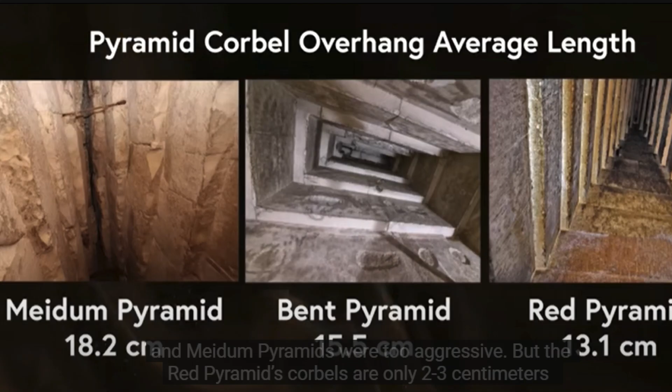But he mentioned something that turned out to be not quite correct, and I thought the research would make a great video. So I'd like to put forward my new research to correct his statements, actually strengthen his narrative, and quantify something that can seem very abstract. How good are the various corbellings? Because the amount of overhang by itself doesn't really tell you anything.

He credits Peter James to a claim that the corbels in the upper chamber of the Bent Pyramid and Meidum pyramids are too aggressive, especially compared to the Red one. There is a single source provided with that author, and it does not mention the corbels. Nor can I find it in any of his other works. Perhaps he misattributed someone else's claim, but I couldn't figure out who.

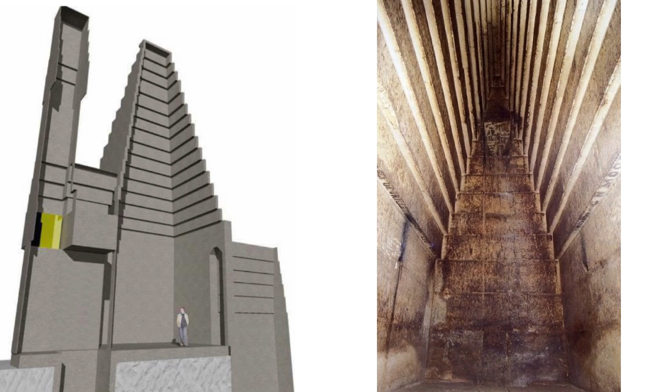History for Granite is a skilled researcher, so I think we can assume that he did read it from somewhere, and it still likely was Mr. James. I wanted to peer review the source, because even a visual inspection gives me the impression that the Red ones are no better than the Bent ones, and I wanted to know how they came up with their conclusion. Was this a back-of-the-napkin calculation or a rigorous analysis? I have a suspicion of what they did and why it's wrong, but without a paper, I can't check their math.

Luckily, we don't really need that paper. I'm perfectly capable of doing that rigorous analysis myself, so I devised a formula to score the different ceilings. If the science is sound, then it should be repeatable, and even different analysis types should agree with each other. If we disagree, well, my source code and data is available in the description, and I welcome the peer review.

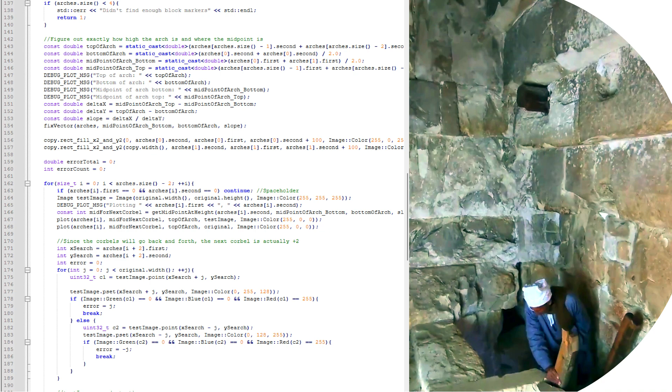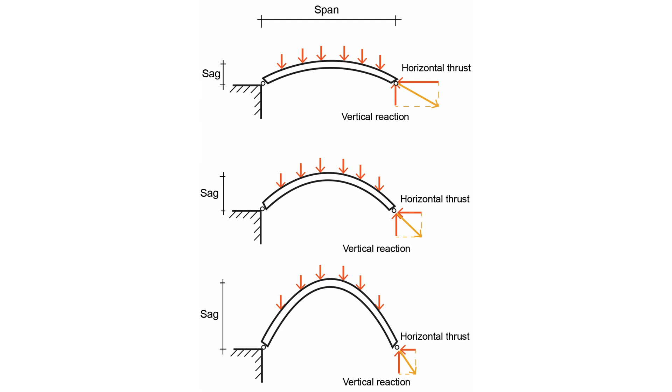I actually went through most of the corbel ceilings of Old Kingdom pyramids, and produced a score for each one, so we can see if they were trending towards or away from correct ceilings. Let me first explain what I even mean by a correct ceiling. In a perfectly shaped ceiling, all of the pieces collectively have minimal forces on them, both vertically and horizontally, since you are redistributing forces. You probably already know that an arch is stronger than straight corbelling.

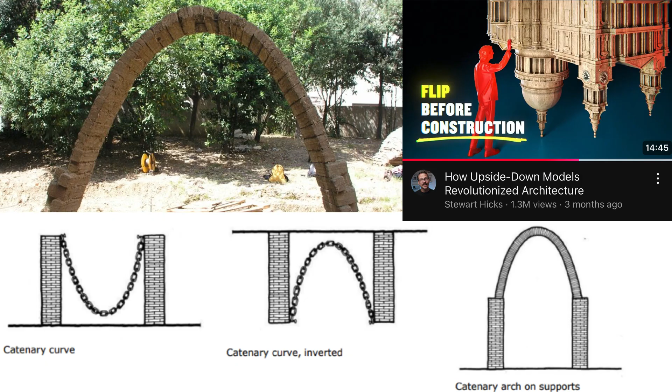This was common understanding by Greco-Roman times, but the truly ideal shape eluded engineers until Leibniz, Huygens, and Bernoulli were able to derive it mathematically in 1691. However, the shape was discovered in the early 1600s, as you can approximate this function in an analog way. If you take all of the forces involved here and reverse them, you change from a compressive force to tension, but the numbers don't change. This is the same formula that predicts how a chain will hang, allowing you to trace it upside down. Check out this video for a deep dive on that subject.

Since I want to specify height and width, I created a function to calculate A for me. I could integrate the differential, but because I know the approximate range, I just brute force it until I find the closest millionth using a binary search.

To mark the location that I want to analyze, I place a pure green pixel on the inner corner of each corbel in a diagram. This tells the software where each anchor is and the slope to the next stone.

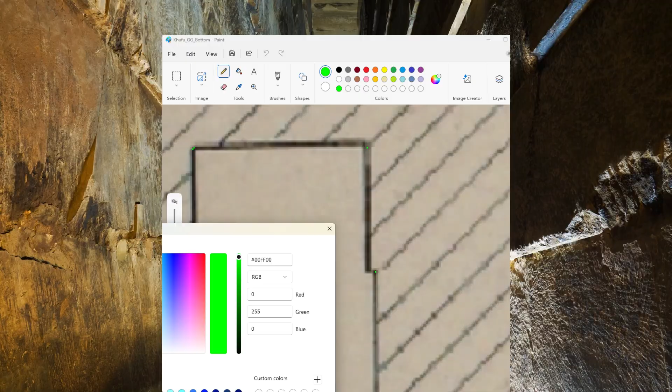A lot of the drawings are diagrams by John Perring, a talented draftsman. There will obviously be some error inherent in that, but I checked them and they're pretty close, plus I slightly stretched them to be more correct, within a reasonable error for my purposes. Some other diagrams were just generated from actual measurements.

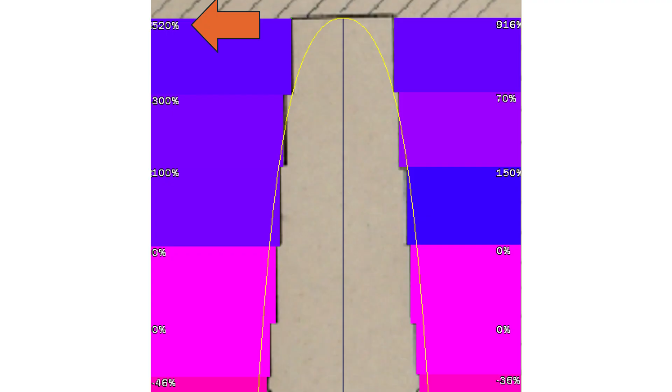I calculate the ideal catenary from the first location, then move up one and see how far the actual next location deviates left or right from the ideal. If the next stone is outside of the arch, then there is no structural problem, but it is shallower than it needs to be and will get tinted blue. For example, the stone on the top left here can ideally overhang 520% more than it actually does.

If the next stone is inside of the ideal curve, then the step is too aggressive, and it is under unnecessary stress. This stress will tint the block red in my output. For example, the bottom left block is sticking out 46% too much.

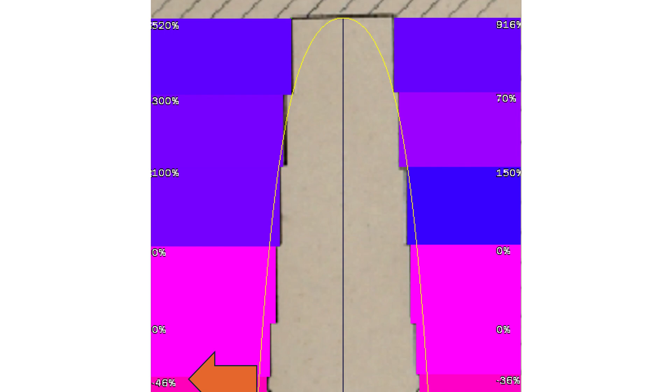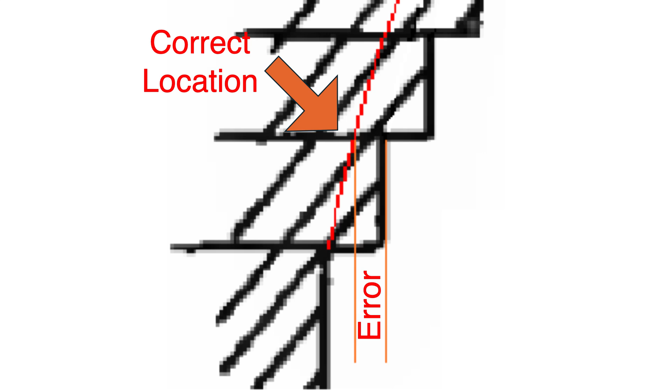I used a distance along the x-axis to determine error. You may think I need to use the curve's derivative and a dot product to get the closest point to the curve, but that's not actually the case because we assume the y level of our course is fixed because we're talking about physical stones. So the horizontal plane is the only axis of movement. You can see this corbel should have about half as much overhang as it actually does.

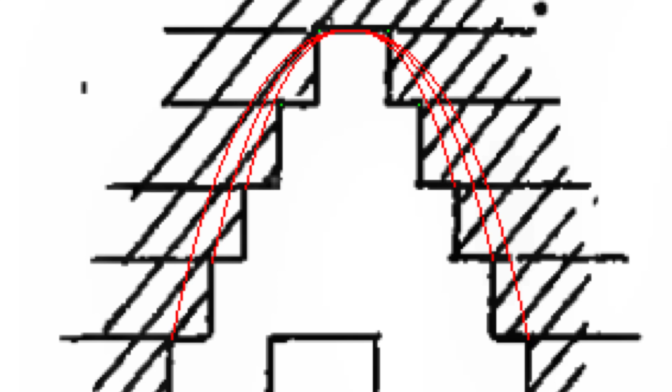Then we move up and repeat. There is the potential to make a mistake here, and perhaps Mr. James did. The ideal curve from the second block is a continuation of the previous curve if and only if the current block is perfectly placed. Otherwise, you are starting a new curve on a new foundation. Each block needs its own ideal curve calculated. This is why my program shows a new curve for each stone.

Here is what a perfectly corbelled ceiling should look like. All the blocks are perfect magenta, and each corner exactly matches the curve. The minor error being shown at the top is from the flattening curve adding noise, but the corbel is mathematically perfect.

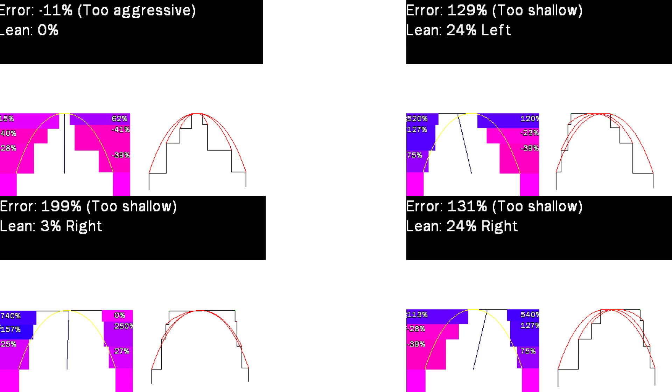Here's a corbelling that's both too aggressive and one that's too shallow, as well as ceilings that lean left or right. The bottom two blocks will always be perfect magenta for reference. These blocks are sitting on the ground, so by definition they aren't overhanging anything. Keep this in mind, it will help you look for subtle differences. I chose this color scheme because everyone should be able to see it, even those who are colorblind.

Those of you with a keen mind for math might realize that if you use a good consistent slope for the corbelling, it'll start too aggressive, like you see, and end up too shallow, intersecting the curve near the top. An ideal straight corbel will still have an average error of 0. Not perfect, but certainly good enough for the Egyptians' purposes.

There is a limit to how high you can push that error before it structurally fails, but we don't know what that failure point is. Other factors like weight, moisture, and stone quality affect that. To determine if the aggressive corbelling played a role in the destruction of said corbels, we need to compare their error value to other pyramids that we know did not collapse.

We should be able to get a Boolean yes or no: were the corbels in the Bent Pyramid any worse than any other pyramid, and specifically the Red one? Well, let's go through the ceilings in the order that I believe them most likely constructed, starting with the upper chamber of the Meidum pyramid.

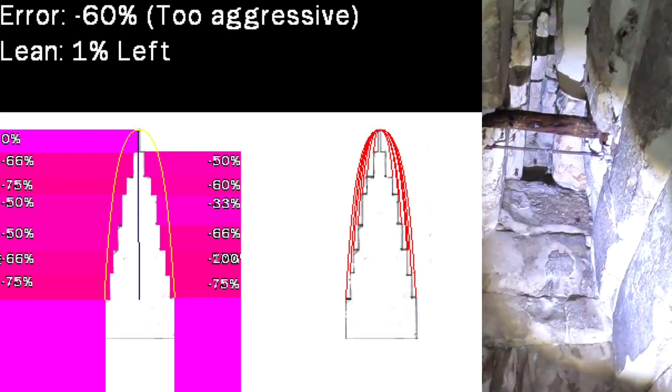It has an average error score of 60% too aggressive. In the Mastaba of Ranefer, also at Meidum, we see an average error of 15% too aggressive. You can see a pattern that these constant slope ceilings are far from ideal and have a lot of extra stress at the bottom. This one was probably designed with a less steep ceiling because it only needs to support a mastaba above it, not a full pyramid. Though they're certainly starting off in Meidum with plenty of room to improve.

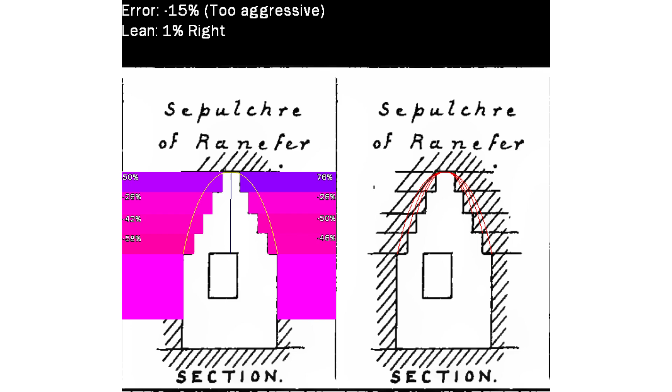In the bent pyramid's lower chamber, we get two different scores because the ceiling is corbelled in both axes. From east to west, the shorter direction, the corbels are way too aggressive. But in the other direction, the ceiling is actually quite good. This is the lowest levels of stress we see so far, actually averaging out to too shallow.

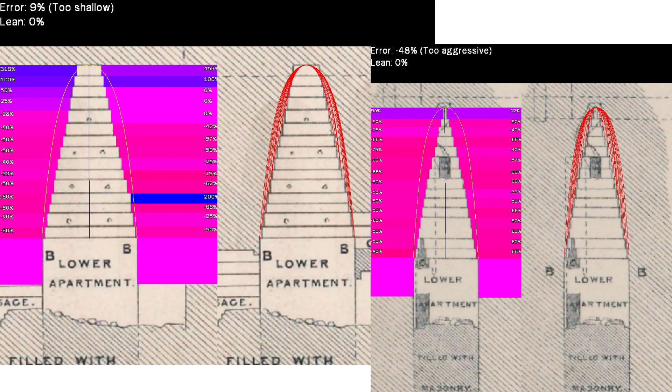Above the portcullis, we see an interesting corbel that is somewhat respectable. The left side is taking more stress, but the right is very close to neutral magenta. The upper chamber is also corbelled in both directions, and although the north-south corbelling is far too aggressive again, in the other direction, we have a number of stones shallower than necessary, just like the lower section. Several of the ceiling stones that show great damage are in these very relaxed corbels, so it seems unlikely that the corbel design caused any damage.

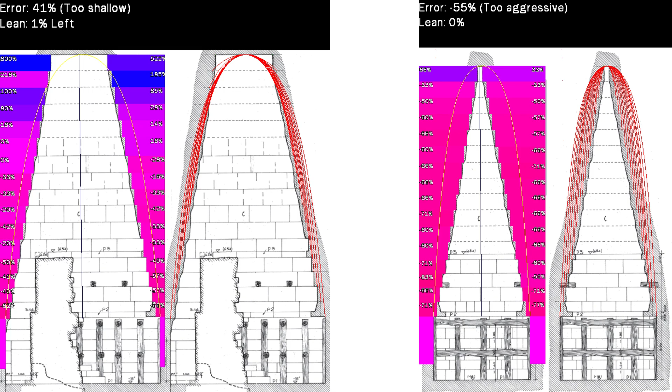Now the moment of truth. How are the corbels in the red pyramid? Awful. These are much worse. You can clearly see every stone is heavily red, even up high with the exception of the very top stone. Remember, the bottom two stones are colored neutral.

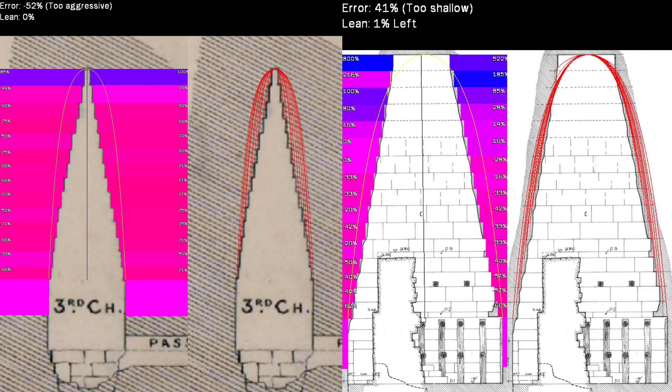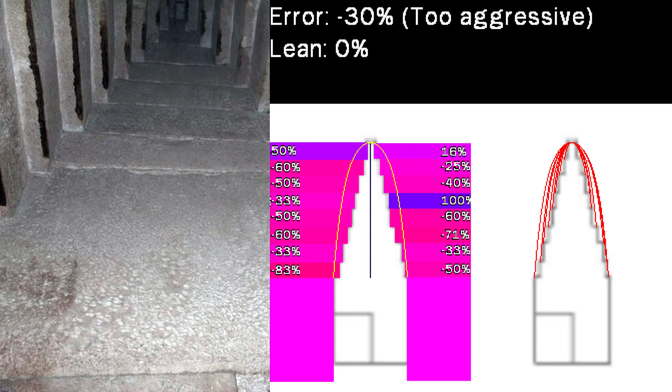For the bent pyramid satellite, it gets a little better, but shows a very similar stress pattern to the smaller chambers of Meidum, so they don't seem to be advancing in knowledge much. However, for the Grand Gallery of the Great Pyramid, they chose a much better shape. Perhaps this was in response to damage already in Snefru's ceilings, or maybe it was dumb luck. A utilitarian use of the Grand Gallery may also explain the different shape.

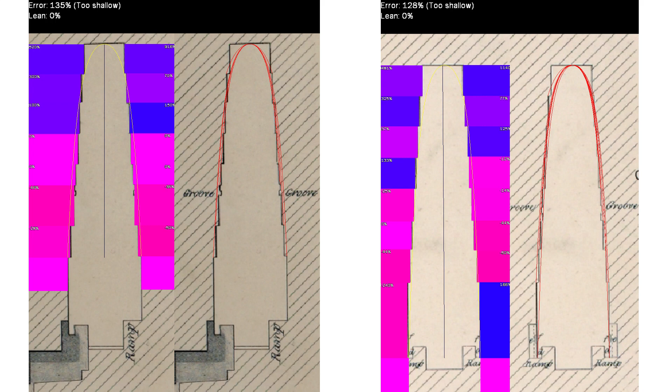I did both the top and the bottom of the Grand Gallery, and they were basically the same. Still starting off too aggressive, but better, and taking a steeper angle means that by the top, the stones could have been pushed 5 to 10 times further.

So in conclusion, neither History for Granite nor I believe this pyramid to be a failure, and that Egyptologists are suffering a cognitive bias because they've convinced themselves that it was. The corbelling in the bent pyramid is demonstrably more sound than those of the red pyramid, so in the same conditions, it should have held. This strengthens our claim that the bent pyramid is not a failure or poorly designed.

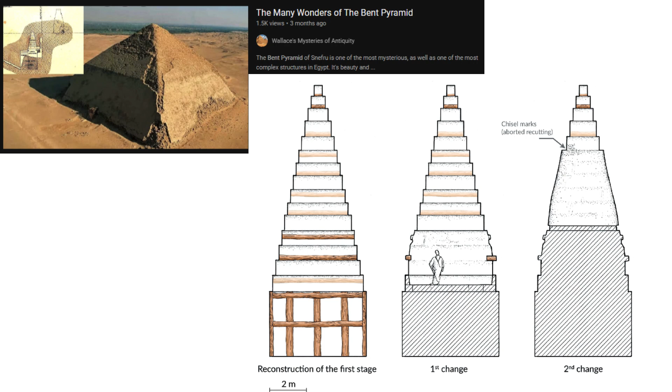I showed in my own bent pyramid video evidence for 3 phases on the ceiling, and I concluded that this destruction was likely the result of human work, not stresses from physics. In fact, I theorize this is actually the shape they were attempting to carve. Doesn't this seem logical? This is Snefru's crown, and it had the same shape since pre-dynastic times. I think they were trying to give his tomb a crown.